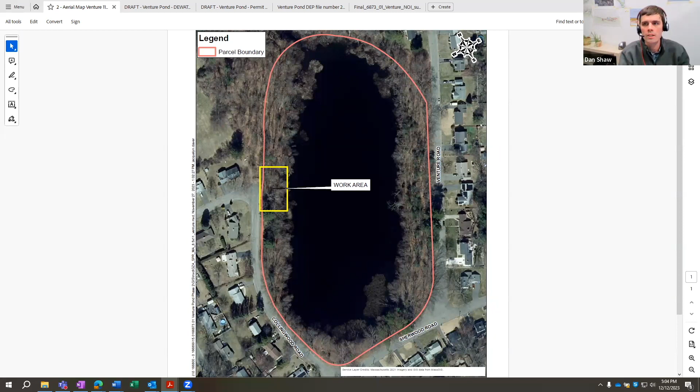All right, so I will get into the wetlands. The site was delineated in August of this year, and I'm going to pull up the plans so we get a little visual. There it is, this one.

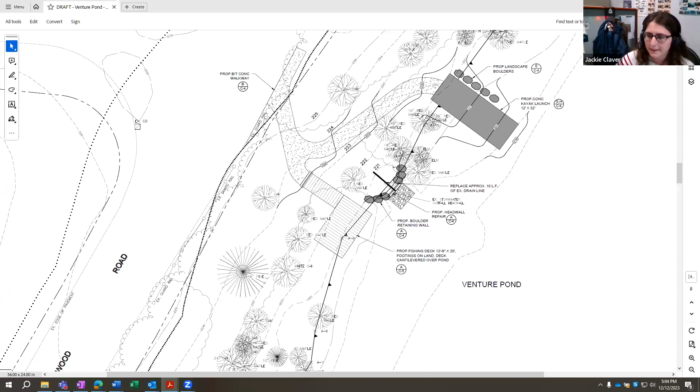So Venture Pond, ooh, the other ones went away. So Venture Pond is more or less a closed system. It has no inlet or outlet. And the resources we found on site include a bank, which is seen by this line right here, and land underwater.

So going into the permanent impacts, the first one I'll talk about is the vegetation removal. So we are removing vegetation inside the pond. These include shrubs and invasive species, more or less by the kayak launch area and along the fishing pier. We're mostly doing it along the fishing pier so that when people are fishing, their lines don't get caught in the vegetation, which would be frustrating to them, and they would cut it, and we don't want fishing line in the pond.

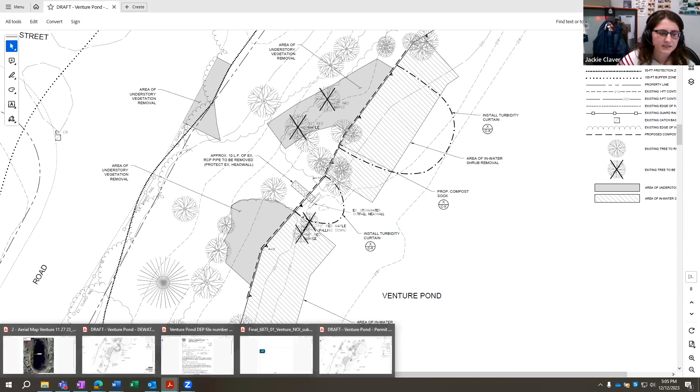We actually have an updated plan for the head wall repair area. We were kind of thinking of this as an option for contractors as we're going through the bidding phase, having a coffer dam instead of just a turbidity curtain, which you see here. So it'll be a turbidity curtain which traps the sediments, but we are also proposing a coffer dam.

For that, we would pump out all of the water inside of the work area so that the contractors could work in the dry instead of the wet. So it will cause less sediment to remove the area, and there will be a dewatering location over here.

Additionally, there will be some tree clearing in terms of the kayak area and the fishing pier. And I believe there's only 4 or 5 mature trees that we are removing. Yep.

Let me find my other one, it disappeared. So for the actual work area, for the kayak launch, they are going to install precast planks. We are proposing landscape boulders along the kayak launch, as currently the people who use the pond hold on to the head wall. It's kind of nice to have stability when you're going to the kayaks, so you don't just fall. Since this pond is so variable in water depth, being a closed system, water only leaves due to trees sucking up the water, so the pond is pretty much flooded all the time. So it'll be nice for the people with the kayaks to have boulders to hold on to.

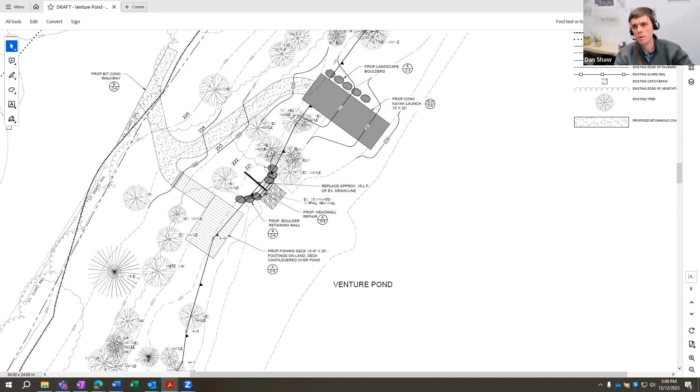In terms of the head wall area, they're going to stabilize this area. We're not doing a full replacement, just fixing the 10-foot section. The pipe goes all the way out to the storm drains on the street. There's an exposed section of that concrete pipe currently, which has a crack in it, and the head wall is leaning. The idea would be to replace that section of pipe, backfill it, provide a boulder low wall surrounding the head wall, and fill in the area that is currently steep and scoured out, exposing the pipe. So we'd be filling that in and restoring that area.

We will be doing proposed seed plantings with native plant seed mix along the pathway. Going into the regulations, we believe we are in compliance with the performance standards for bank and land underwater. Additionally, we did a wildlife habitat evaluation, which we attached to this application. We are looking to get a variance to work within the Springfield 50-foot undisturbed zone for the pathway and the tree clearing that we have on the land.

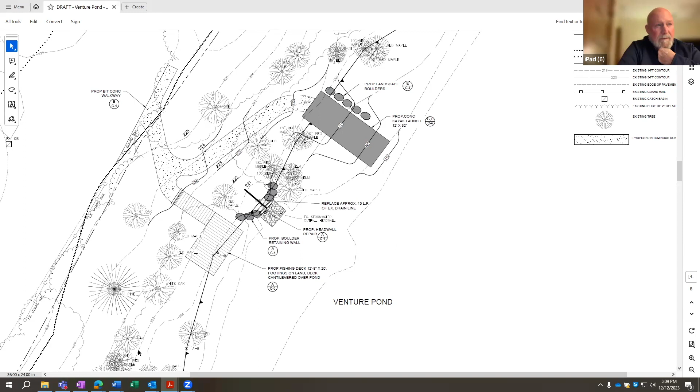So we did receive comments back from DEP. Do you want me to go through those? Please, we'll pull those up. Just getting my notes. Oh, not that one. Oh, too many files.

All right, so the first one: what time of year is the work to be performed? The work is expected to start at the earliest in spring of 2024. That will be determined by the bidding and when they plan on starting work, but that is the earliest that we know.

They had a comment that some of the work is eligible for review as a limited project, and we believe he was referring to the fishing deck, which is to be constructed entirely in the buffer zone. It does not involve permanent impacts to the bank or land underwater, and the fishing pier is on piers, so it'll be above the land, allowing water to flow underneath it into the pond as it currently does. The work is expected to meet the performance standards, so we do not feel it requires review as a limited project.

The third comment is that the existing stormwater outfall is located in the bank resource, which is currently not allowed under current regulations. That regulation does not allow discharges or control of sedimentation to be placed on a bank resource. The regulatory preferred option is to entirely remove the outfall from the resource area and have a setback from the receiving water, so that neither the pipe nor riprap will be located in the resource area. He says limited projects do not apply to this regulation. So we are not entirely replacing the stormwater system; we are just fixing the 10-foot section of pipe and the head wall area. If we were to move it back outside of the bank and into the buffer zone, it would involve a lot of land clearing and grading to meet the current stormwater regulations.

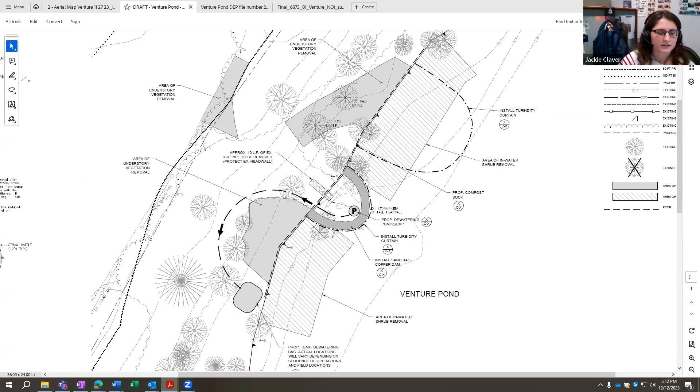And then the fourth question is: why are the proposed landscape boulders to be placed in the land underwater? He is referring to these right here. I mentioned that currently the users of this area use the head wall for stability, so we're trying to create that same feature for the new kayak launch, allowing people to hold on to these boulders. These boulders can also be seen as habitat for fish to hide under and maybe turtles to climb up.

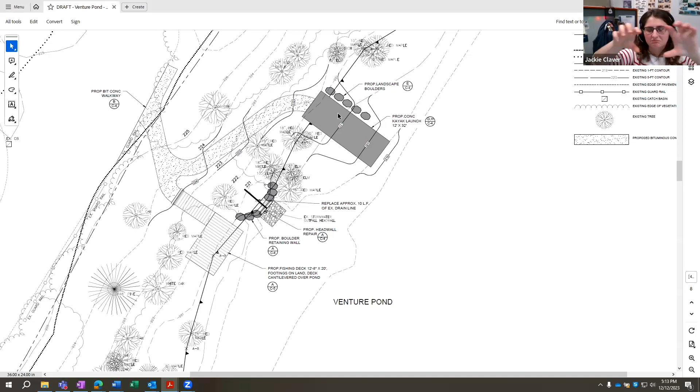So we're just trying to provide the same features that are currently there, but more natural, using boulders instead of a giant concrete bar that wouldn't be so natural and pretty for this area.

Where do you anticipate they will actually launch, on the side where the boulders are, or the other side? Probably this end. Since we're going to have the boulders here as a resource, we'd hope people would walk down, come off the kayak launch and hold on to these boulders, so they don't mess with these overhanging trees right here, and hopefully people don't grab onto them as they're going in. They would grab onto these boulders instead.

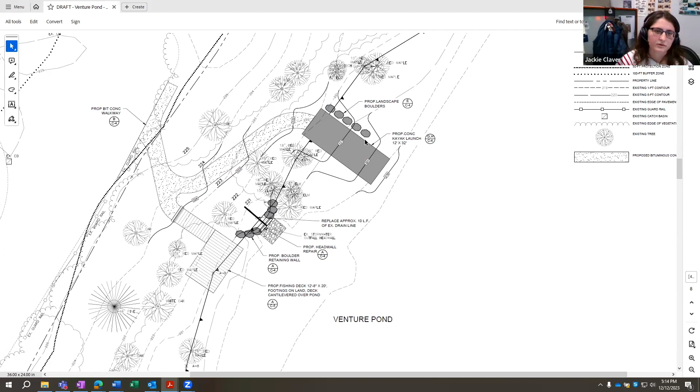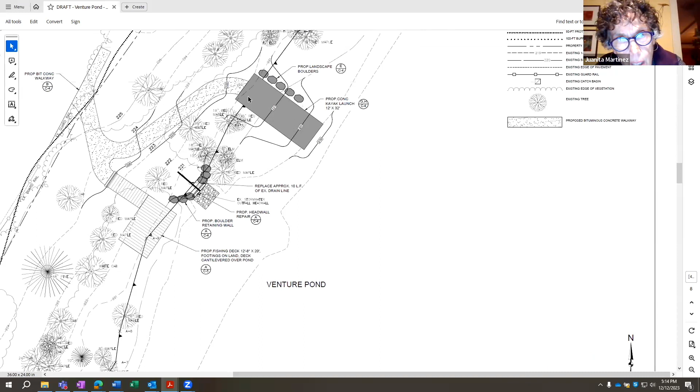What is the space between the kayak launch and the boulders? Could they put the kayak right in the middle there, which would make it real easy to get in, or is it very close? So there's the kayak launch, the dark gray rectangle. And then just before you get to the boulders, there seems to be a space. Is that space big enough for a kayak? It looks like it's only about 2 feet, but I don't have the full scale.

I've actually seen some kayak launches where those boulders are set back enough so that you put the kayak right there, and it protects the kayak from tipping when you're getting on from the launch. I was wondering if that's the intended relationship here. The launch you're seeing is 12 feet in width, and people would carry their kayaks down and wade into the water on that dark gray rectangle, setting their kayaks floating on the water, and then they could steady their hands on those boulders right next to them.

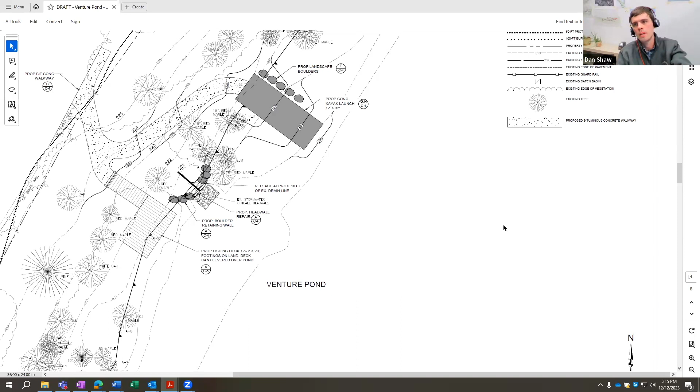It's shallow there, shallow enough. So there's 1-foot contours shown coming out along there, so it's an 8.3% slope, similar to a handicap ramp, an accessible ramp. And the slope coming down the hill leading to it is 5%.

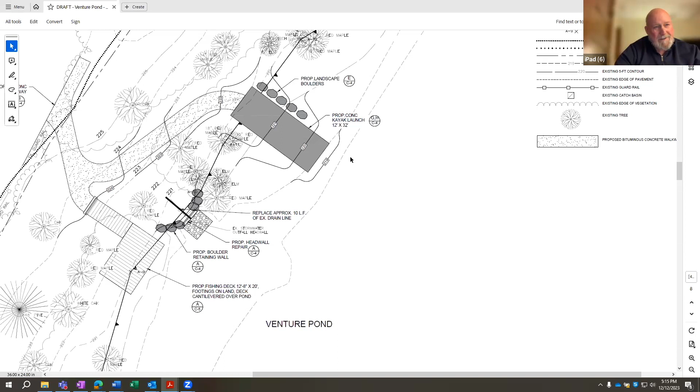But I see what Juanita's saying. If the boulders were 30 inches away from the edge of the ramp, they would put the kayak in between the boulders and the ramp. That would be another nice way of doing it. The dark gray rectangle is a ramp at the surface of the ground extending into the water, so that ramp ends up being half underwater. It's not going out over top of the water, it's a walking surface.

And you end up knee deep in water by the time you're halfway out there. So you're steadying yourself on the boulders like a three-dimensional boat ramp feature. It's like a boat ramp, it's a modest, permanent boat ramp for hand-carry boats.

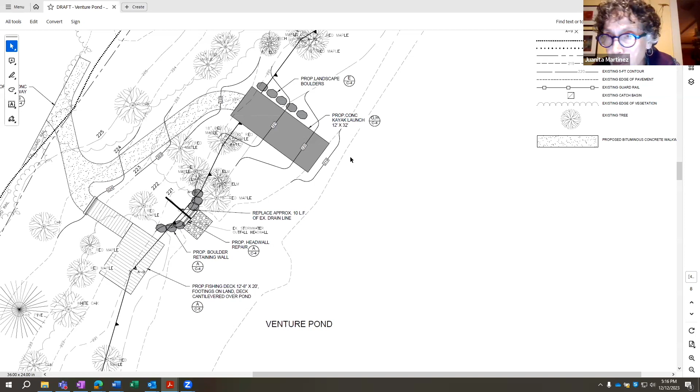I was thinking, because my next question was, was the deck permanent? These features are permanent. What about the fishing deck, is that permanent or would it be seasonal? It would be permanent. The option for a seasonal deck would involve more maintenance from the Parks Department having to pull something in and out of the water.

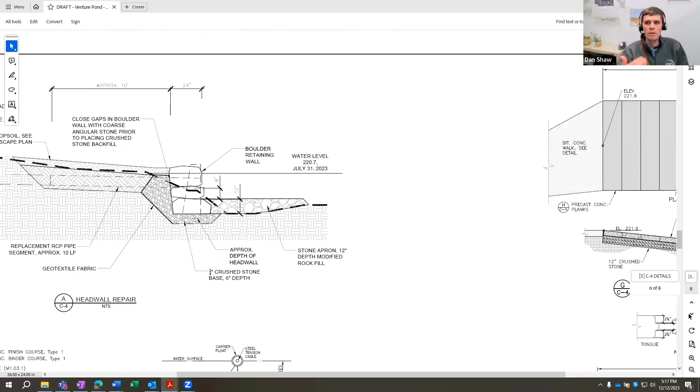So we felt by siting it entirely on the land side, but designing it so it cantilevers out, it provides that water access but doesn't require that amount of high maintenance. Here's a good detail that shows you the relationship.

Question, why bituminous? Why not crushed stone or stone dust? That choice was to prevent erosion, just to make it more durable.

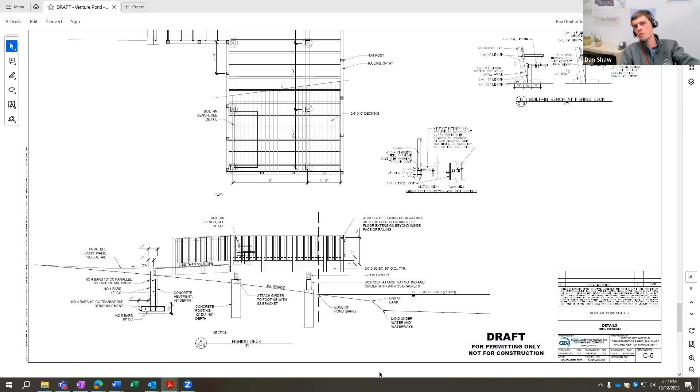A site like this, where we don't have enough horizontal space to have, say, a drainage swale or something else to intercept water coming down. If we have runoff crossing the path and it were a loose material like stone dust, there wouldn't be much to prevent sedimentation and erosion from coming off of that path over time and getting into the pond and causing rutting. So we felt that this would be the most low maintenance, low impact way to have a firm and stable, accessible way to these features.

Okay, it looks like it's a pretty mild slope, right? It is, yeah. It's a 5% running slope and a 2% cross slope. And it's sited where it is just to navigate vertically from the road up above down the 4 or 5 feet to the water's edge. So that's why we picked that layout for the path.

Yeah, it just makes it pervious if you do it with the stone dust type stuff. That's the only thing. Yeah, that material. Is this material pervious? It's not. This bituminous is not, right. This is asphalt. Oh, asphalt. Okay. Macadam, right? Yeah. Certainly more stable for a wheelchair. And for maintenance, I'm sure that's one of the reasons too.

I tell you what's going to happen if the winters get back to being cold again and the ground freezes. That's going to become the area where the skaters are, and they'll end up shoveling it down to the fishing deck and putting their skates on there. That used to be the neighborhood. That's where all those kids learned to skate. They all had hockey games, but it doesn't freeze anymore. None of them do.

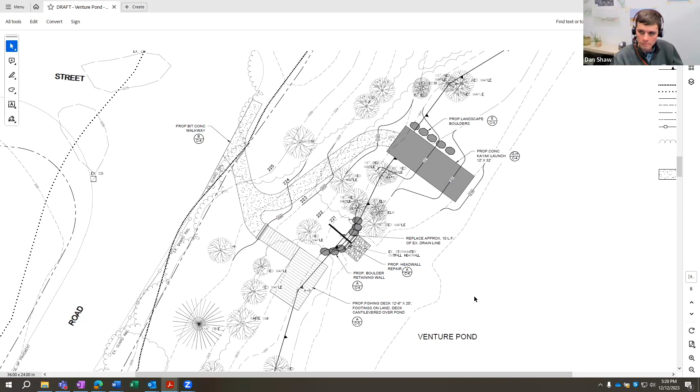Since I don't hear any, we will need to continue this because we are doing it on Zoom, to allow time for public input. The public may call the main number at 413-787-6020, or you can also email me at pdromey, D-R-O-M-E-Y, @springfieldcityhall.com. So if anyone in the public has comments they'd like to give during the two weeks in between the two meetings, please feel free to do so. And then at the next meeting, we'll close the public hearing and issue an order.

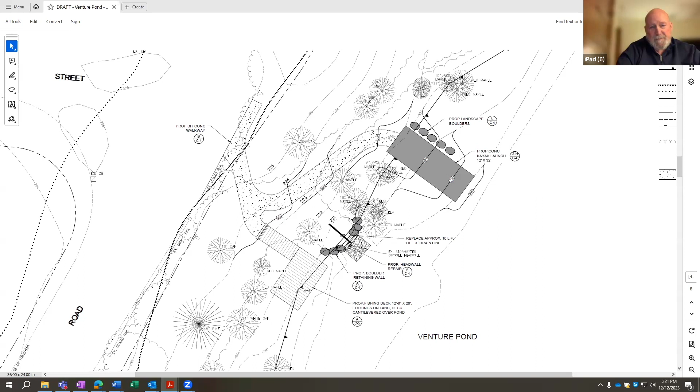A motion to continue until our next meeting is in order. I move to continue. Thank you, Frank. I'll second it. Thank you. So voting, also, if you guys could just stop screen sharing, thank you. Voting to continue the meeting: Mr. Collins, yes. Ms. Martinez, yes. Mr. Alminius, yes. Mr. Miller absent. Mr. Jones, yes. Ryan, yes. Okay. This will be continued, and just to give a heads up, it won't be until the first meeting in January, because we're not gonna have a second meeting in December.

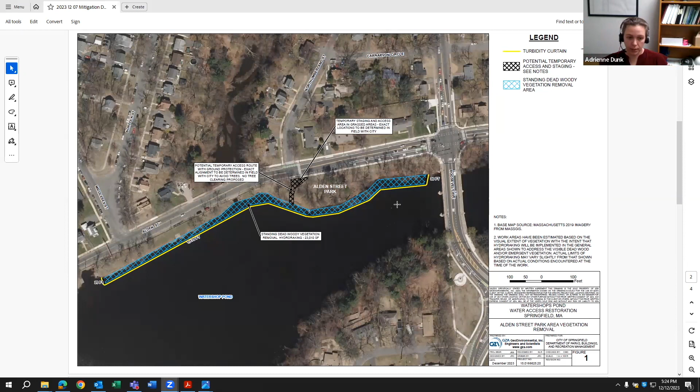And then we're proposing in this long linear stretch to remove this standing dead locust that's there. And I have a photo. So it's this limited area where locust trees grew and they are sticking up and they have big thorns on them. And so they're impeding fishing in the area. People are getting their fishing lines all caught in them.

So the hydro rake has this big rake scooper and it scoops up just the vegetation and it leaves the sediment behind. And then it puts all the vegetation into a net that's above the water, so the water drips off of the plant roots back into the lake. And then they kind of barge that back to land, put it in a dumpster, and they'll dispose of it off site. There is a turbidity curtain proposed around the whole work area. So if there's localized sediment disturbance, it'll just settle back in place.

There's also standing dead locust. The second figure that was submitted to you, this is still Alden Street. There's the existing boat ramp here. There's a big patch of standing dead locust here in the middle of the water. It's about 200 feet. So on a windy day, if you're trying to use that boat ramp, you might get blown off course. So we're proposing also to remove the locust in that area. I don't have a photograph of it because from the boat ramp, it's very hard to see with the existing tree limbs in the way.

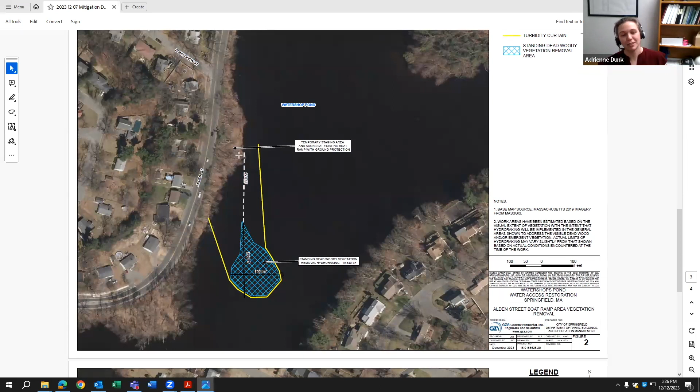And then the third and final location is up in Dan Baker Cove at Gunnery Sergeant Sullivan Park. So up here it is more shallow and quite a bit of emergent vegetation grew, and it's currently obscuring the boat ramp that exists here. And so I have a couple of photos of that. So this is the end of the boat ramp. Oh, wow. Yes, totally obscured by cattail, and there's some phrag out further in the water. So nobody can use this boat ramp right now at the city park.

And so again, we're proposing hydro raking about 120 feet wide, just so that people feel safe and comfortable accessing out into the open water of the lake. They feel like they can navigate it. They're not in a little narrow tunnel. And again, there'll be a turbidity curtain, and the hydro rake works the exact same way on the emergent vegetation. It gets the plant and the root, and it leaves the sediment behind. Which is the only way to get rid of the cattails and the phrags, is if you get the roots. Exactly. That's why just a cutting or some type of surface treatment wouldn't really be effective in these locations.

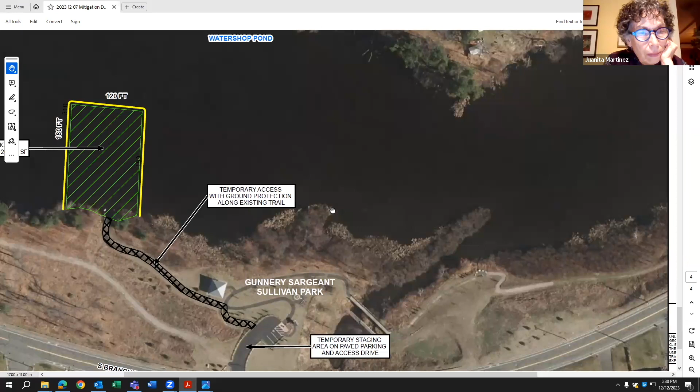The Phragmites is deeper, is further away than the cattail, but implementing the water monitoring program during the drawdown, and since its refill, I have kayaked up Dan Baker Cove several times, and there's a lot of cattail in the pond. But it's a little bit obscured by the dense vegetation on the shoreline. So if that piece was taken out, it's still on either side of it. Yep, this is cattail in the image. This is cattail in here, and this is a 2019 image, but there's quite a bit of cattail extending both up and downstream.

Yeah, that cove is fairly shallow. That's where cattails, it's an ideal habitat for them. And they were starting in there before this work started. Yes, and they took off during the drawdown. Since the pond has been refilled, we have seen quite a bit of dieback of them, which is expected. I know you joked about cold winters before. If we have a few cold winters, we would expect the cattail to die back pretty quickly. We can't count on that.

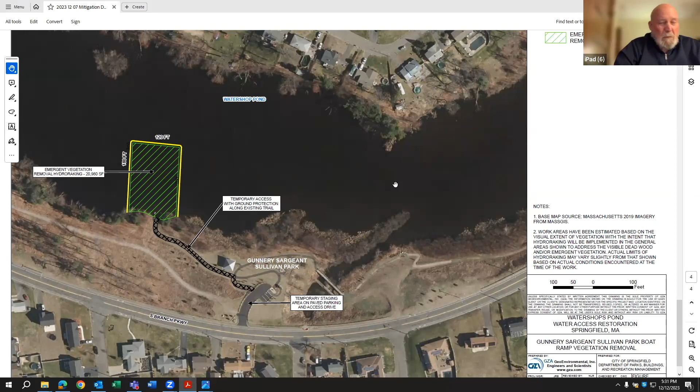And so we want to ensure public access in these few areas, but then allow nature to take its course in limiting the cattail over time, more slowly elsewhere. Yeah, the cold winters just keep them in check from spreading. They spread by rhizomes and roots, so it wouldn't kill them all completely. Even if we had 2 or 3 old-time winters, it would just shrink the size of them. That's all. Yeah, exactly. Push them back towards shore a little bit. It might take out the deep water cattails, but we would expect cattail to continue.

Yeah, right. Are there other questions? Okay, again, this is just a discussion because this is under an already existing permit. Any other commissioners have questions about the work? It's desperately needed. Thank you.

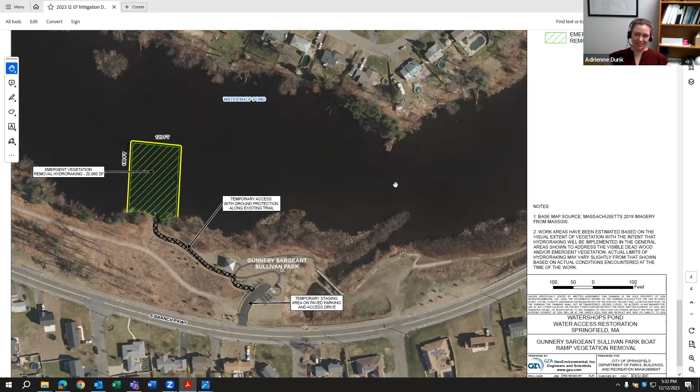I'm all set. There's one more bit of trivia about the black locust: in the old movies where you see the old castles, there would be a moat and also a large thicket. It was the black locust that they planted because the thorns on them are so nasty. So it's just a little bit of trivia history. Great detail. They are also the largest species of legume. Yes. Oh, yeah, right. That is right.

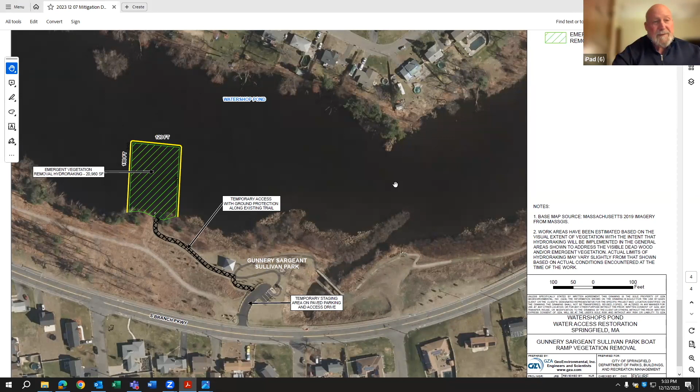Okay, well, thank you for the update, and that is covered under the maintenance of the permit that's there. So this was just an update for the commission. Great. Thank you all for your time. Thank you. Thanks.

Okay, so as I indicated, both Alvin and I are out of the office on the 26th. I think the 26th was supposed to be our next meeting. So the following meeting after that is January 8th. So I'll continue the notice of intent to that one.

The 26th is a great day to take off, Phil. It's a good family day. I'll be driving back from Philadelphia, so.

But anyway, just a reminder, the Conservation Commission position is still out. If anybody knows of anybody, it's posted on the city website. I think it closes on the 17th, but I'm not sure. I'll keep it open depending on how many applications we get. Have you had any? I don't know that until it closes, and then they tell me. So at that point, I can ask them to keep it out. But I did send it to the Massachusetts Association of Conservation Commissions, and I also put it on the planning listserv I'm on. So we'll see.

Hopefully we get somebody. I think there were some people interested before, but the salary needed it. It was a pretty good increase. I think it went from 52, which was the starting, up to 69. So I'm hoping that draws some interest. So we shall see. Yep.